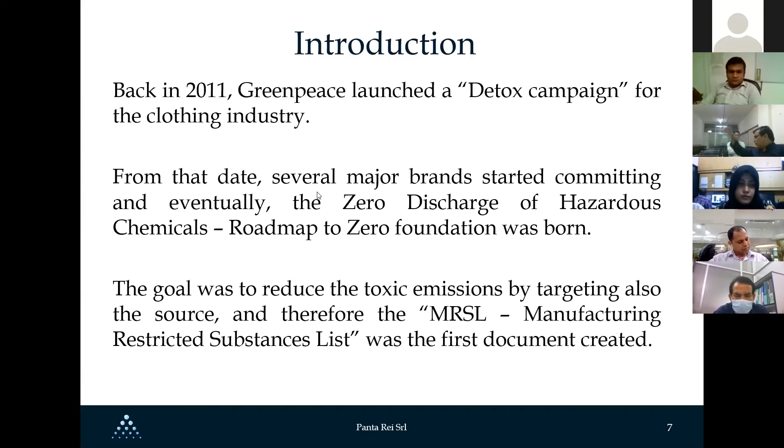What are the objectives of ZDHC? Well, basically, the guideline that guides ZDHC says that we want to protect the planet by reducing the industry's chemical footprint. That means that we have to work hand in hand with the entire value chain. So what is the value chain that we talk about? Well, the value chain are the global brands, the chemical suppliers, the manufacturers, so the manufacturing units, and organizations that share this vision in order to create a new way forward together.

The mission was to enable the brands and retailers in the textile, apparel, and footwear industries to implement sustainable chemical management best practice across the value chain, so for everyone. And the vision was the widespread implementation of sustainable practices. So the key words here are collaboration in order to have best practices through all the value chain, to work together for a common goal.

And this is the manifesto. We believe in the preservation of our planet and that production and nature can coexist, that there is a new way forward, a new way to do things without harming the environment and at the same time creating work, creating wealth in all the countries where the companies are present.

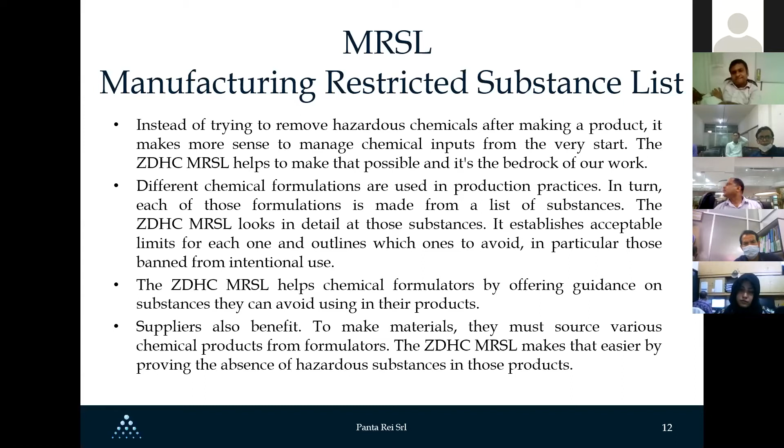This is the image of the document, which you may have. This is very important. In case you need any information about this, you can also download this information from the Roadmap to Zero website. I'm going to write it in the chat so that you can all see it, where to get the information from. I have sent it now.

Okay. And now, this is also the ZDHC principles and procedures, because some people were asking, okay, so what are the principles and procedures? How did you elaborate this manufacturing restricted substance list? So this way we're giving you the answer. I mean, these were the procedures used in order to elaborate this manufacturing restricted substance list.

This is part of the chemical management. If you're part of ZDHC, if you are producing for brands, for buyers that are part of ZDHC, you may have heard about the chemical management system, which supports worker safety. And there, ZDHC hosts also several seminars about chemical management in order to protect the workers, in order to give the industry a guideline of how to handle all the chemical substances that are involved in the process. And this is part of a two-part process, the other being the environmental management system, where the wastewater comes in.

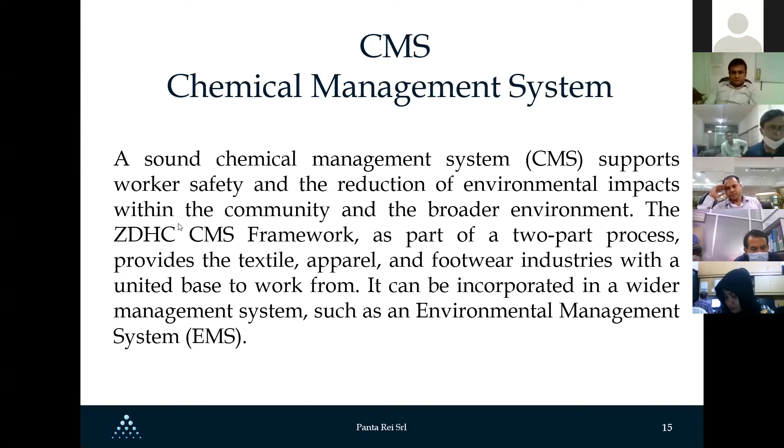There is the chemical management system framework, which is also downloadable through the Roadmap to Zero website. This is available, or if you have any specific query, we can also send you documentation through our agents.

And so why are we regulating the inputs? In order to have better outputs, safer, cleaner outputs for producers, for the people, and for the planet. So in this case, we're going to measure indicators such as wastewater, the sludge, and the air quality in order to validate the work that is being done, in order to validate also the chemical inputs that we're using.

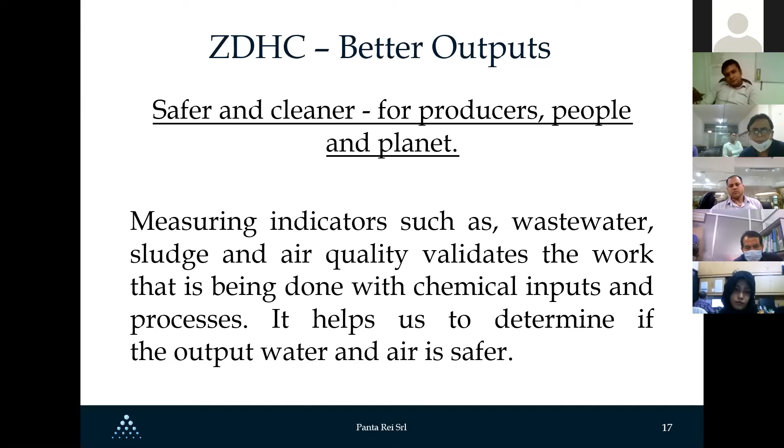So now we're coming to the wastewater. As you know, Panta Rei is a ZDHC contributor. We're a solution provider, in this case for wastewater. So we're focused on the wastewater, because as you already know, there are large quantities of water that are being used to manufacture all the clothing, all the footwear products. And then the wastewater gets released. If we do not properly treat the wastewater, then it can be a threat to the environment.

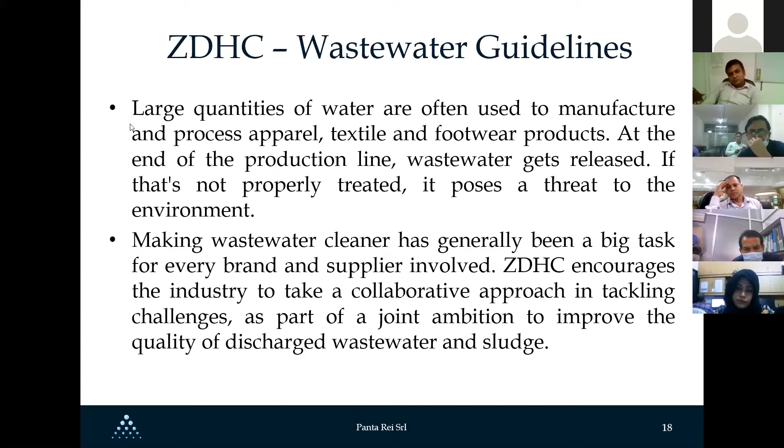So one of the main goals of ZDHC has been making cleaner wastewater through a collaborative approach. These wastewater guidelines have been drawn with the support of the brands, of the manufacturing companies, and also of all the associates, the laboratories or the solution providers like us, so that everyone can give an opinion about these guidelines. We have these guidelines to have a standard requirement in the global apparel, textile, and footwear supply chain. This means that also universities, laboratories, and brands were involved in the making of these guidelines.

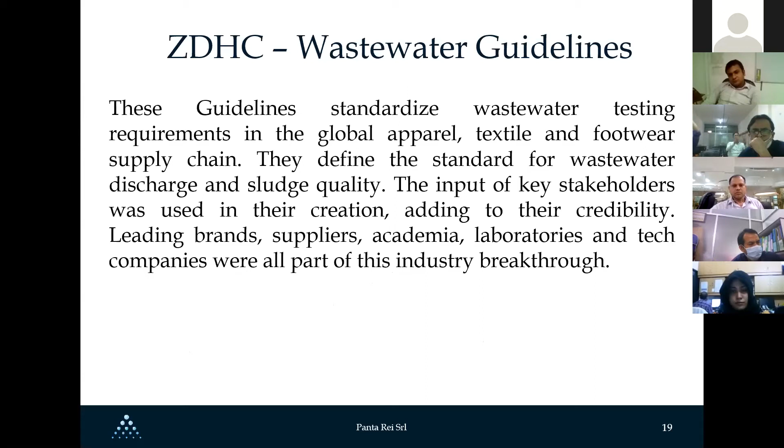These are the wastewater guidelines, version 1.1, which was released last year, because from 2015-16 we had been working with some guidelines. Now there are some new guidelines that were released in July last year. And basically, the limits for wastewater are mostly the same. There are some new approaches regarding the sludge generation, but the main wastewater parameters are the same. And this is a very important part.

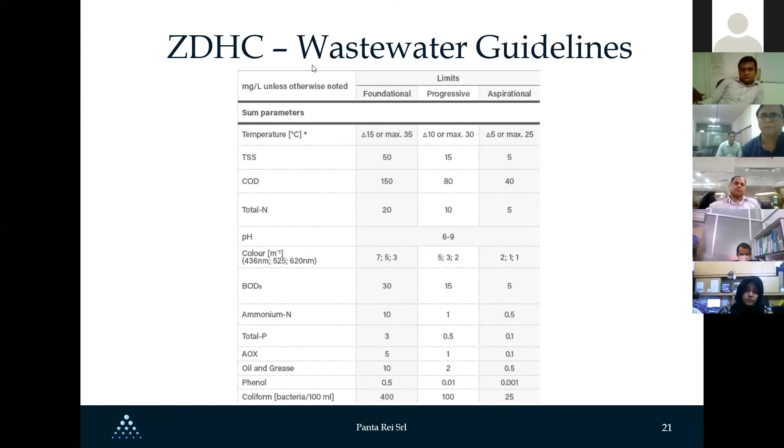After you have done your productive cycle, you will have your raw wastewater that goes into the ETP. From the ETP, you will have the discharged wastewater that can go to the river, to the channel, to a lake, to the sea, and then you have the sludge.

Of course, the new guidelines talk about sludge too, because it's not the same having biological sludge or chemical sludge. When you do a chemical-physical treatment, you get a much larger amount of sludge, which is also chemical, not organic. If you do a biological process, you will get a completely organic sludge with safe disposal. And the wastewater can be discharged.

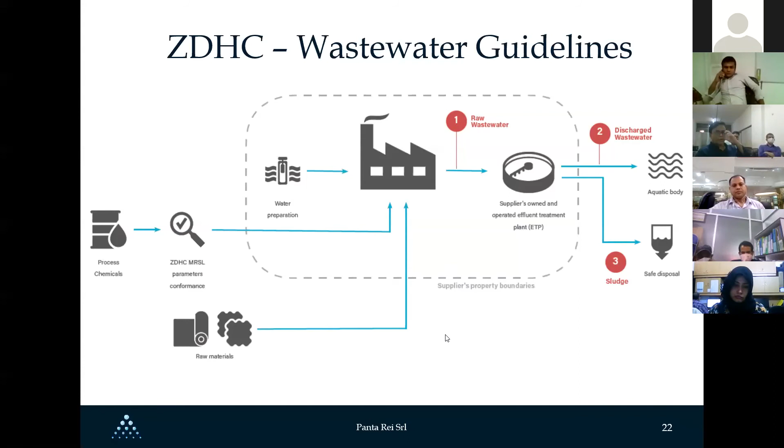And after we have talked about the guidelines, we have to talk about the gateway. Because if you are compliant with the guidelines, there is a gateway. There is an online platform which is called the ZDHC Gateway, which is where you can put the information and it will be accessible to all the companies who are part of ZDHC and who have manufacturers that are producing in the textile and footwear apparel industry.

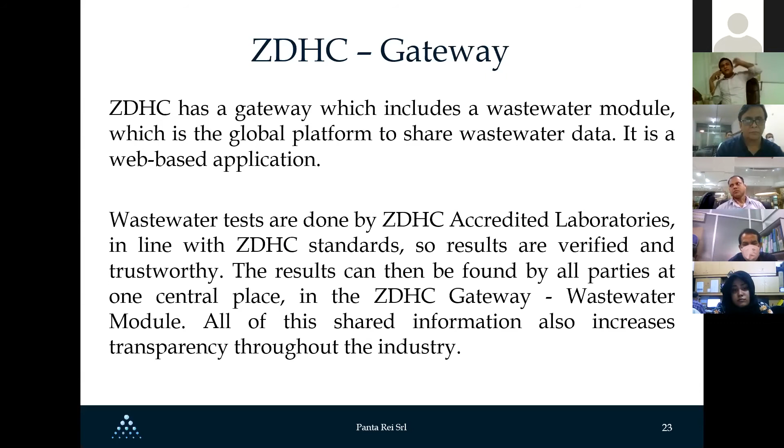This is the way to concentrate all the information in one single site, the gateway. Many of your chemical facilities may be familiar with this already, and maybe you're already using it. How do you benefit? In this case, most of the participants to this webinar are suppliers to the brands. So how do you benefit from this gateway? Well, sometimes testing the wastewater can be an issue because there is a lot of bureaucracy involved, and maybe you don't know how to do it, and maybe different brands were asking different things.

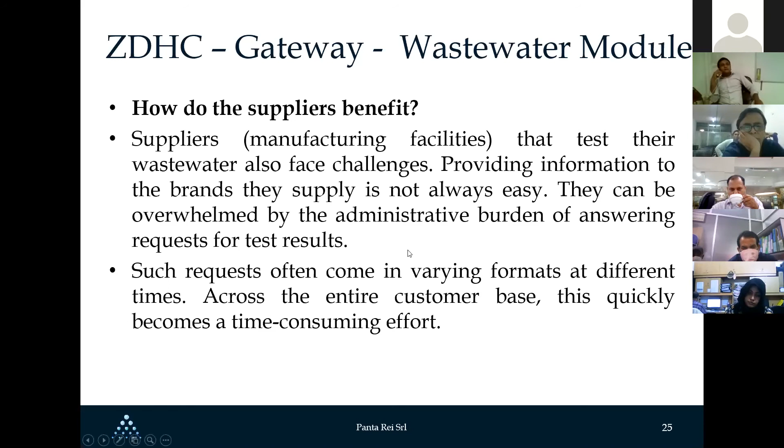But in this way, if you go to the gateway, there will be a one stop, because you can load the information there and it will be available for everyone, and there is a single standard for everyone. So with this, the brands, for example, that we saw before, Nike, H&M, also all the Inditex group, or whoever, can see the information from all their manufacturers, from all their suppliers in one single place.

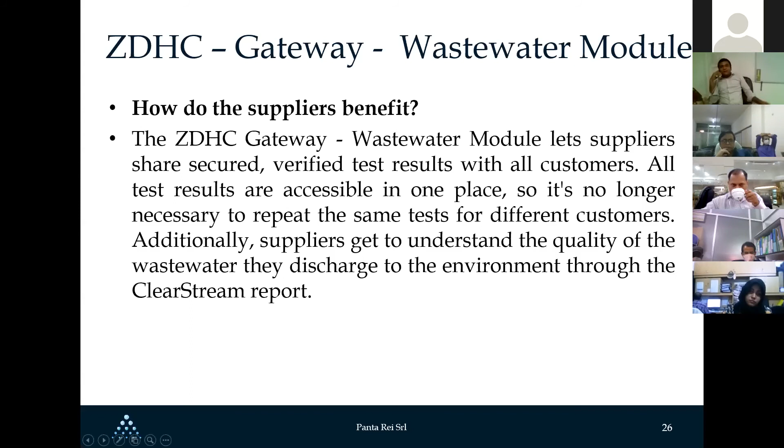So they are not going to be asking you, give me this information 3 times, because maybe one brand will come to you and will ask you for the results, and this way the other brands don't have to ask you the information because it will be already in the website. So you have to do it only once. So you don't need to respond to each and every brand.

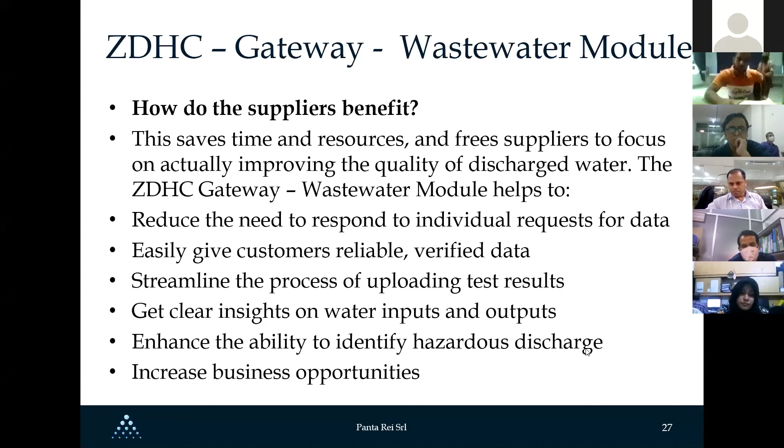You can give the information and verify data, because also the accredited laboratories have access, so they can verify the data and say, okay, this supplier, this company is giving right information, you can upload it and it's verified. And you can see what your inputs and outputs are, because here you can see also how you are doing regarding the chemical process and the MRSL. It will be in this same page.